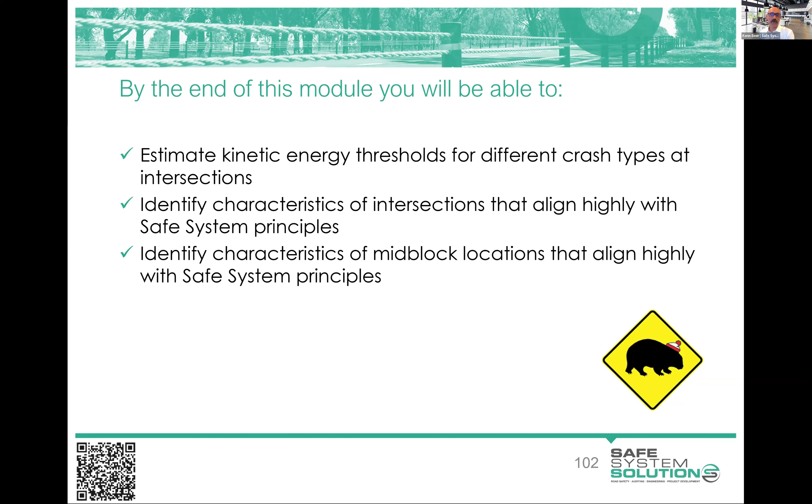This session, we're going to dig further into kinetic energy thresholds and kinetic energy management for intersections, and we're going to look at what we can alter in intersections to improve safe system alignment. Then we'll do the same for mid-blocks. A mid-block is just basically anything between intersections, the rest of the road network.

If we have a look immediately at intersections, I think everybody intuitively knows that there's risk of crash at intersections, and that's fairly obvious. You can see a picture there of a vehicle-to-vehicle crash at an intersection. That's what people think about usually when they think intersection crash. But I want to flag that there's a lot more going on at intersections in terms of risk than just the vehicle-to-vehicle crash.

We do see increased risk of run-off-road crashes, so vehicles leaving the road at intersections. This is predominantly because they are avoiding something that's happened - another vehicle has pulled out, or a pedestrian is crossing, or something's happened, and they are alert and they avoid that initial crash, but it results in them leaving the road.

Also associated with that, intersections tend to be a point on the road network where there is a lot of fixed hazards, a lot of fixed point source hazards. So we might have things like signal pedestals, we might have culverts, we might have power poles, because you need to take the power line that's running along one road and turn it so it goes down the other, where you need a pole there.

I talked about culverts, where you need to get the water that's traveling along to go under a road, essentially. So what happens is we've got an increased chance that a crash will happen, and then we've put in place things that make it more severe when it does happen.

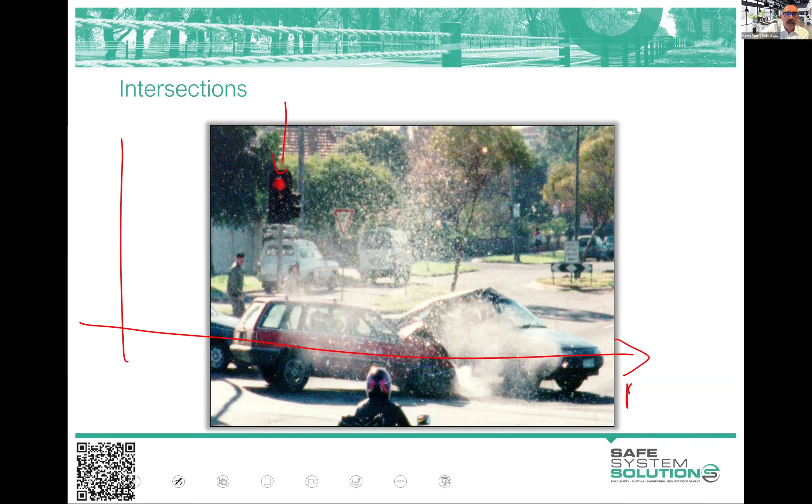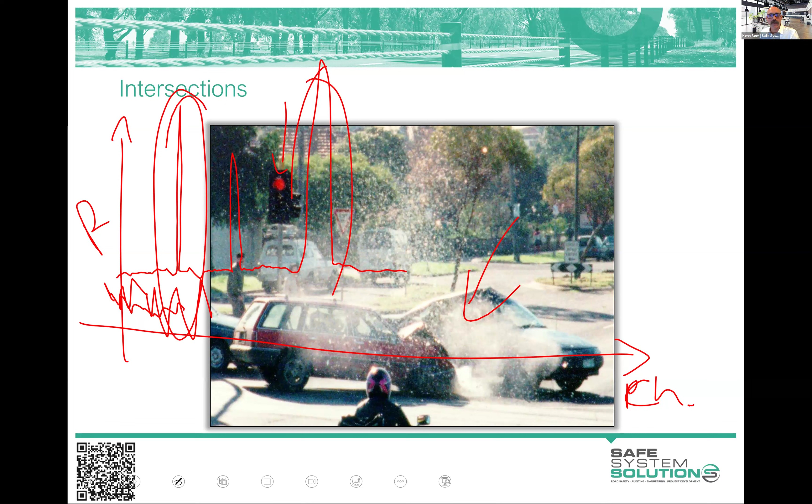If you look along a route and take a risk profile along the route - so we'll make this chainage, chainage is like length along a road, and we'll do risk here - we'll see that risk bubbles along and then spikes. There's inherent mid-block risk down here, but then at each intersection we just see this spike in risk. The risk is of crashes like this, but also crashes involving leaving the road, hitting objects, and the fact that pedestrians have to cross, cyclists are subject to turning traffic, and all sorts of other challenges. So intersections become this really interesting point in the road network.

Monash University Accident Research Centre a while back came up with some high-level principles on the management of intersections on the road network to align highly with safe system principles. The first ones to see there: fewer vehicles and fewer intersections. Very interesting starting point, isn't it? You'd like to think, oh well, the way we make intersections safer is to get rid of them and get less people traveling through them.

Both of those influence the exposure to crashes. We talked about right at the end of last session: exposure to crashes, likelihood of crashes, and severity of crashes. We're going to continue working on that throughout this module. Your little assignment that you're going to be given after this is associated with digging into what influences exposure, what influences likelihood, and what influences severity.

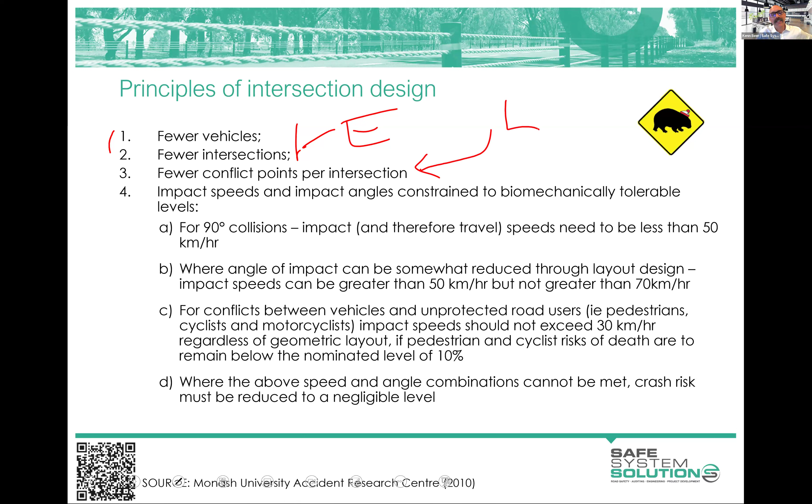Fewer conflict points per intersection influences the likelihood of intersection crashes. The fewer points you can crash at, the less chance there are of crashes. Then we get into all the things that influence the outcome, the severity of crashes. That's the angle of crashes, the speed of crashes, and the vulnerability of road users involved in crashes. We go back to our safe system threshold speeds for different crash types to understand what speed we should be managing intersections at, what angles we should be having conflict points at to lessen the risk.

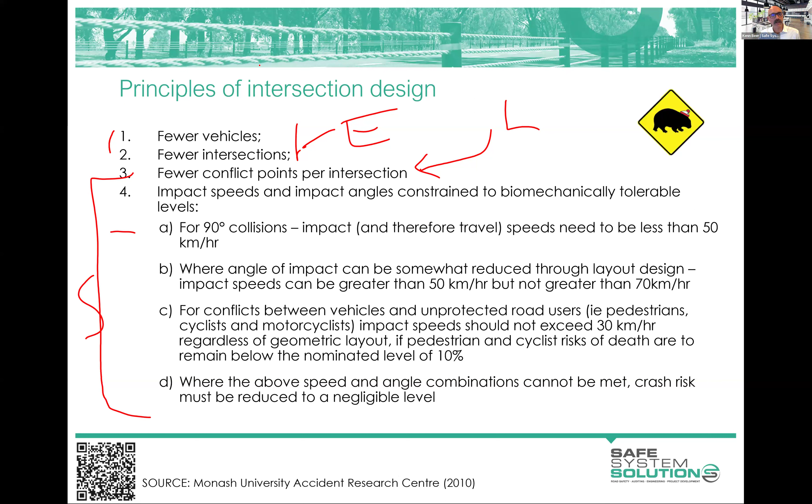I think probably the easiest way to do this is through some real world examples, some case studies, us analyzing some intersections and looking at what is influencing risk and what ways we can alter this and manage it. So I'm going to jump off this slide now.

I think simplifying some of those speeds and angles, we can use this information to say, well, 50 kilometers per hour for 90-degree vehicle-to-vehicle crashes. So crashes, this is car-to-car stuff.

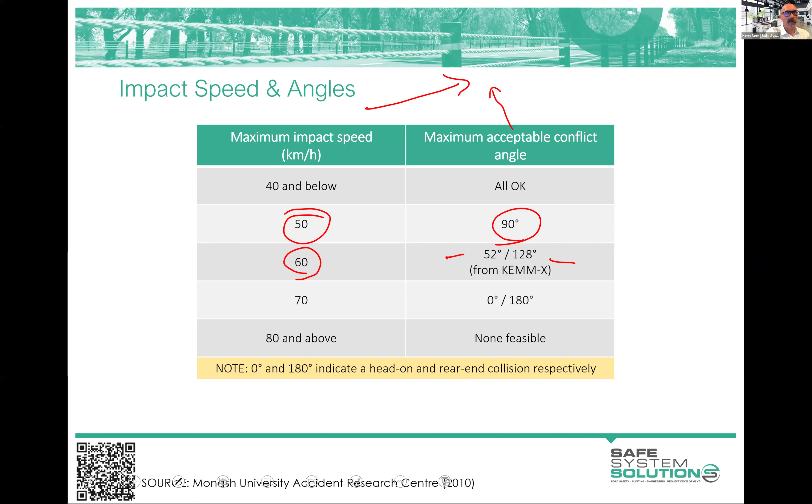If we get more speed on it, we have to improve the angle. So what I mean by that is if you can crash at about 50 kilometers an hour bullet vehicle speed, if you can improve the angle, you sort of bounce off a little bit. You push energy into the environment. You remember this from year 11 vectors, probably, physics. That angle crash pushes energy into the environment a bit. So we can get a bit more speed of that crash happening.

70 for head-on and rear end. But do remember this is delta V. So you can have vehicles crashing with these sorts of angles, and we know that one of them could be going 150 and one could be going 170, and we've only got a 20 kilometer per hour delta V there. So the initial hit and the transfer of energy is well within tolerable limits of any sort of configuration that they hit. Of course, traveling at those speeds and then leaving the road, possibly, then we're way out of the territory of survivable energy. But for the initial crash, at least, that's certainly within energy transfer survivability.

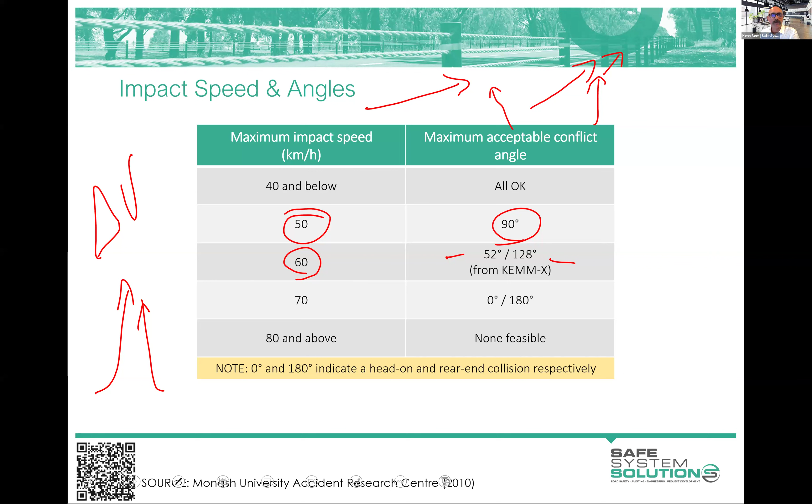So as Safe System assessors, we can estimate angles crashes will happen and speeds, and that's what we're assigned to do.

You don't need to be this precise, but anybody who's in CAD can easily do this. We can just say, okay, we've got a vehicle that's coming out here and we've got a vehicle that's coming down here. I'll change the color of this just so it's a bit easier to see. Vehicle coming down here, vehicle coming out here. Okay, that's kind of about a right angle, isn't it? So that's probably, officially it looks like it's 104.

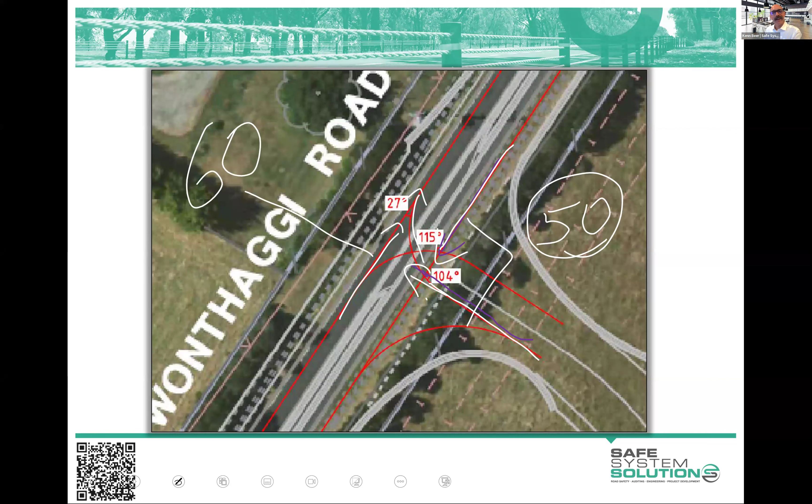But it's close enough to a right angle. We know that it's about a 50 kilometer per hour crash is about our limit for passenger vehicles. Over the other side here, okay, well we've got much more angle on this, so maybe that one could be more like a 60 kilometer per hour crash. So you can see we're taking angles of crashes, we're taking the road users involved, vehicles, and we've related that to a threshold speed, a speed that we can't really do beyond before it becomes much higher risk to road users.

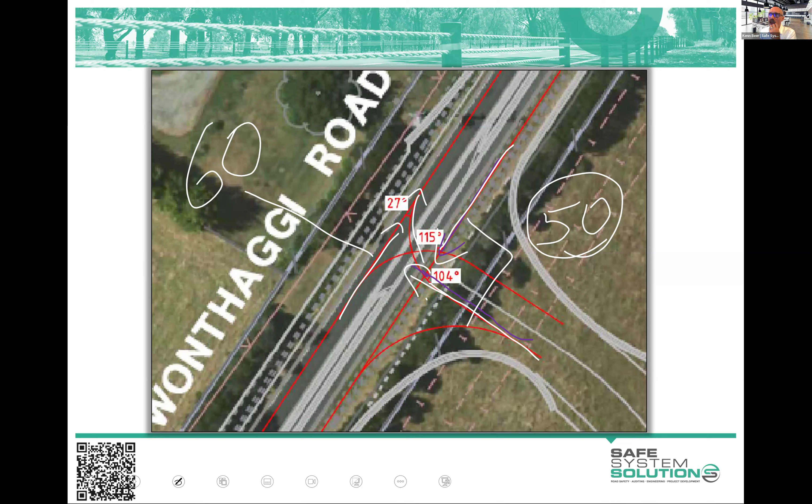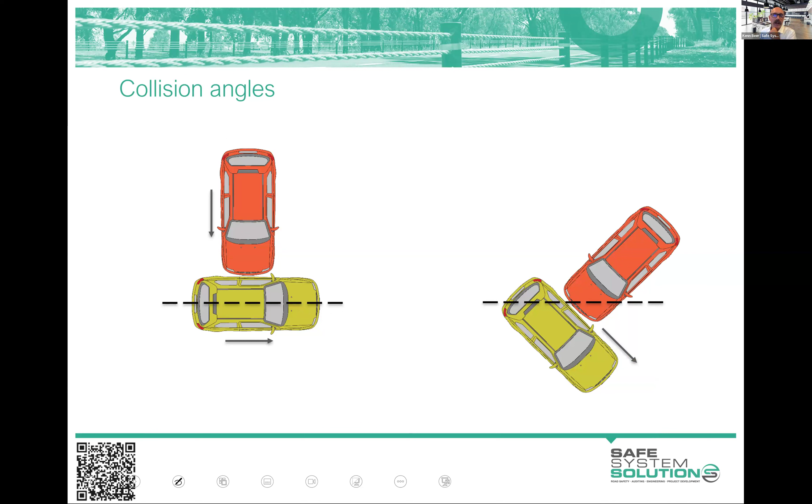Another thing to always remember is vehicles clipping other vehicles, avoiding vehicles leaving the road, crashing around intersections and the hazards. Secondary crashes, we'll often call these, where the initial crash may not actually cause the damage. It's hitting those power poles and trees and things around the intersection that causes the other impact.

The Centre for Automotive Safety Research did a big study on this, and they looked at intersections and where secondary crashes had caused death and serious injury, plotted those onto the one axis, and we see there that you've got vehicles coming into an intersection. They replotted them all onto the one axis, and that's where our secondary crash impacts are likely to happen. Kind of obvious, isn't it? Did they need to do a big study on it? Probably not, but nonetheless, that information is there.

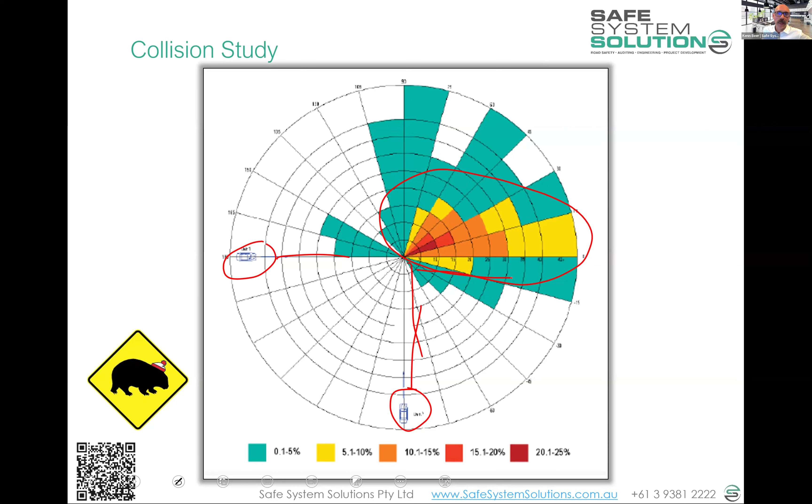Yeah, we do have a question. Is mid-block accident likelihood increasing, Ken, with numerous high-speed crashes being reported in recent times through suburb racing and pedestrian deaths?

It's a good question, I can't say definitively yes or no. It's increasing, it's decreasing - run-off road crashes with death or serious injury remain a very high proportion, especially in country areas, though urban areas certainly have it too. We see different things hitting media headlines which influence our thoughts on that. Most jurisdictions put out fairly comprehensive death and serious injury analysis reports, but they usually lag by about 3 years in terms of getting data together, analyzing it, and going through layers of ministers and executives reviewing it before release. Nonetheless, you can track that for your jurisdiction - it's usually publicly available, so I can't answer definitively, but good question.

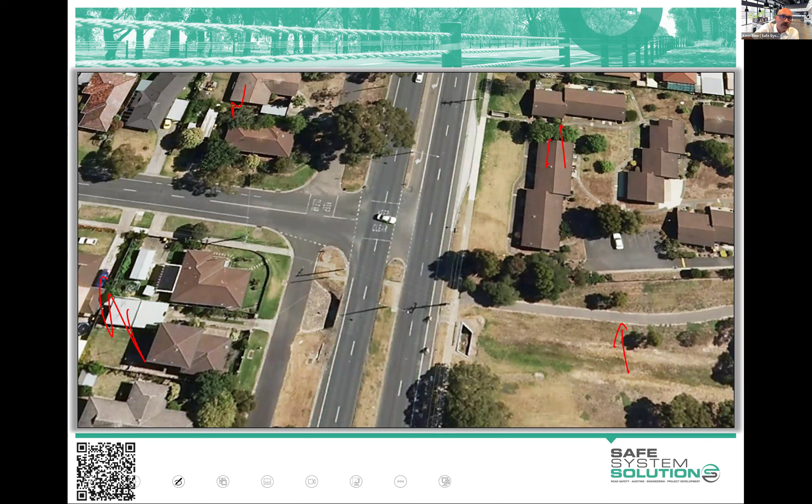So we've got a residential area. This is a shared user path down here. This road, the main road, is a 70 km/h arterial road with 22,000 vehicles a day, and a decent percentage of heavy vehicles - 12%. So: 12% heavy vehicles, 22,000 vehicles a day, 70 km/h speed limit, 2 lanes in each direction, as you can see.

The side road here is a 50 km/h speed limit, with about 2,000 vehicles a day, mainly an urban collector style road. There's a school up the road, about 400 meters away. These are service roads - two-way service roads - with access points further down, just providing access to those properties essentially.

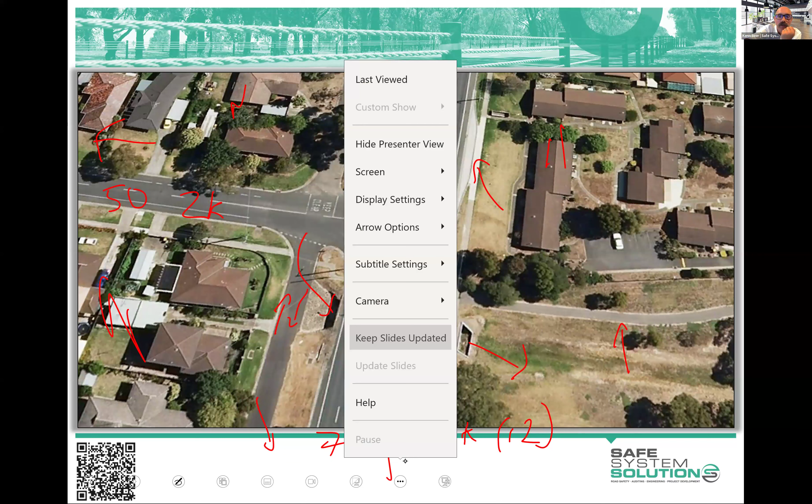What else can I tell you about this? That's a bus stop, this is a bus route, this is a B-double route. That is a drain culvert, so water would go in there and out there - it looks big, but it's not, probably about a meter and a bit high. Up the road here, about 400 meters or maybe a bit less, you've got a set of traffic signals. Down the road, about a kilometer and a bit, there's another set of traffic signals.

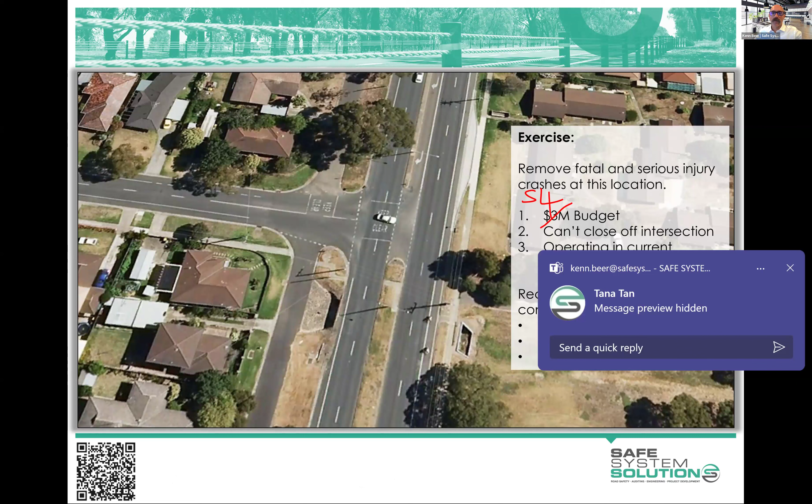So your job here is to eliminate death and serious injury at this intersection. Now I'm going to budget constrain you - I'll give you an extra $1 million, so you're going to have $4 million. I've got my Teams thing happening again - you got $4 million.

You can't close the intersection, so vehicles need to be able to come out and turn left and turn right, and they need to be able to turn in from both directions. You're also operating in the current political organizational framework you're currently in, so think about how, if you've got some really wild ideas, you'd navigate them through actually getting approved and seeing them on the ground. But the big thing I want you doing is for every idea you come up with, have a go at categorizing them - is that influencing exposure to crashes, likelihood of crashes, severity of crashes, or a combination?

Now some of you probably don't have any idea what infrastructure or other initiatives cost, so I'll be your instant cost estimator tool. If you have an idea and wonder how much that would cost, just put the word 'cost' with a question mark into the chat and say what you are thinking about, and I will tell you how much it costs. So you could say grade separation, like a flyover or overpass, and I would say $47 million - well outside your budget. What's the cost of traffic signals? The cost of traffic signals would be $3.1 million.

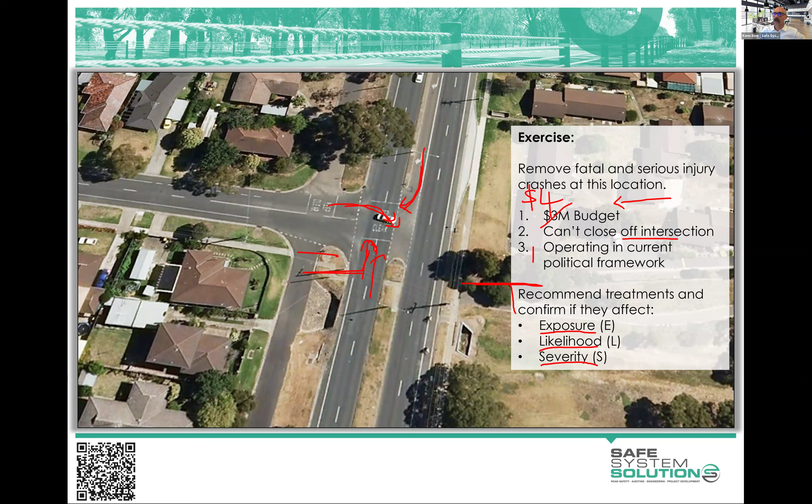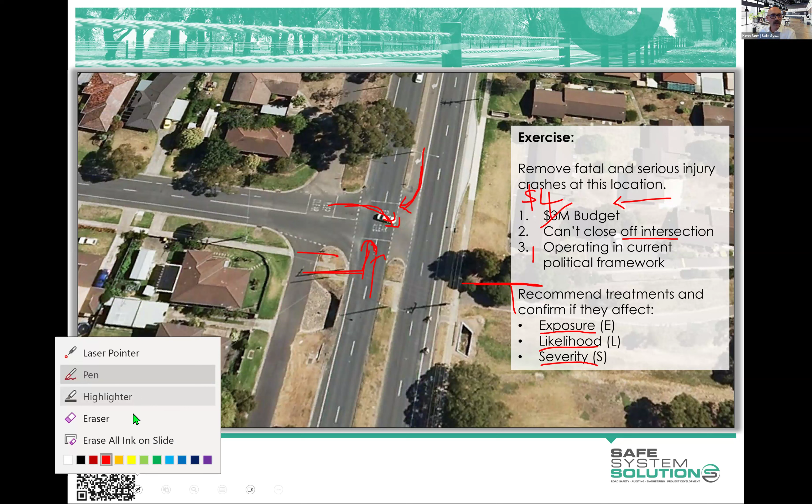And what I'm really interested in is ensuring we get our head around exposure, likelihood, and severity. So let's go. Where am I going to start? Okay, so we had traffic signals. Quite a few people gravitated towards signalizing this intersection.

I think some of you have been around managing road networks and the like for a while, and you can sort of immediately see some of the things, the unbalanced flow, so lower volume and higher volume, which usually signals if you're needing to control things, comes out as something you tend to like to do.

And then there's a bit of inconsistency across this group on whether traffic signals influence exposure, likelihood, severity, or some combination. The way we need to think about it is that traffic signals don't alter the number of vehicles, pedestrians, and cyclists going through this intersection. Yes, there's probably some situations where traffic modeling shows a little bit more because they use this intersection now, or a little less because they avoid it, whatever it is. But in the scheme of a safe system assessment, that's usually not big enough to actually change your exposure to crashes. Because exposure is just numbers, right? How many vehicles, how many people, how many cyclists? So by putting signals there, have we fundamentally changed how many go through there? No.

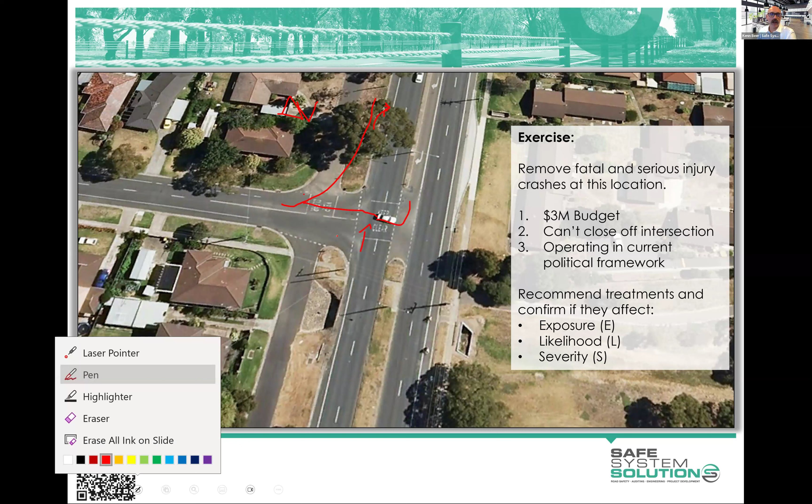Just reading through a few here. We've got some people who want to do left in, left out, and they're really determined to do that. I was trying to say we can't close this, but I like the idea and I like the pushing, because fundamentally, if we could close this whole intersection and divert vehicles around to an existing, very safe intersection, that's a far better outcome. Or if we could close this off and just have vehicles going left out of here and left into here.

We've got friendlier crash types because of the angles. And then you would have to create some sort of U-turn facility. So a vehicle comes out here, merges over time, turns, merges back in and accelerates. So that would be good.

I would call that lessening the likelihood of crashes as opposed to the exposure to crashes, just for the fact that we still have the same amount of vehicles doing the same thing. Within the general envelope of the area, they're still exposed to crashes, different crash angles and those sort of things. So it reduces the likelihood of crashes. I think if you got your traffic modeling done, you'd find that altered the number of vehicles trying to make these turns a bit.

Okay. So we've got a username in here, Crockerell. Maybe that's the surname. I'm going to give a prize there, Marissa, because we've got quite a bit of detail on this one and some good ideas, and reasonably good in terms of the categorization. Could do a little improvement.

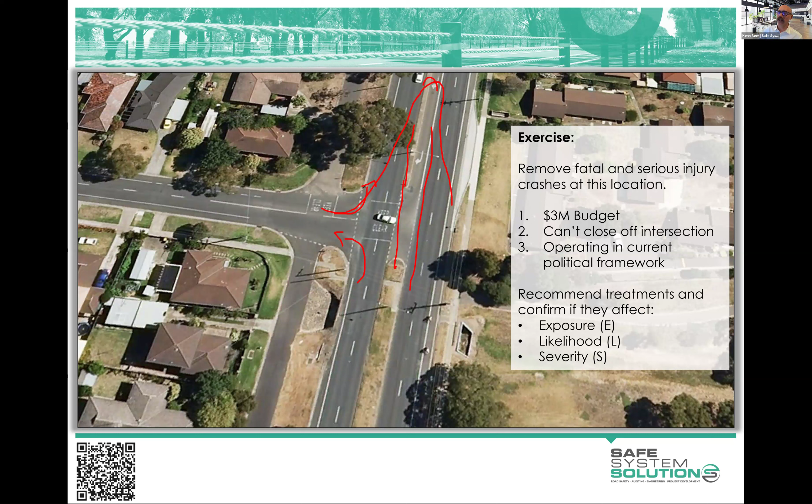Talking about a mini roundabout. Now I like this, because I said a full-size roundabout would cost a lot. What about a smaller roundabout? Good thing to think about. And that would actually influence the severity of crashes.

We would still say we're going to get the same exposure, because the same number of vehicles, pedestrians and cyclists are going through. The likelihood is a really interesting one, because it just changes the types of crashes that are going to happen. You'll get more rear-ends, more sideswipe crashes, but the severity is going to be much, much lower. And then some associated works, speed zone reviews and the like.

I'm just jumping through here, apologies if I jump past. I'm looking for something a bit different out of there. So one-waying the service roads, okay, that would just influence the likelihood of crashes. People may say, oh no, there'll be less vehicles now. Well...

Again, I don't like in a safe system assessment to make very firm predictions on alterations in patterns and the like. You're just less likely to crash if it's that consistent way to go. Mind you, I don't think alterations to the service roads in this scenario will have a lot of impact on safe system alignment.

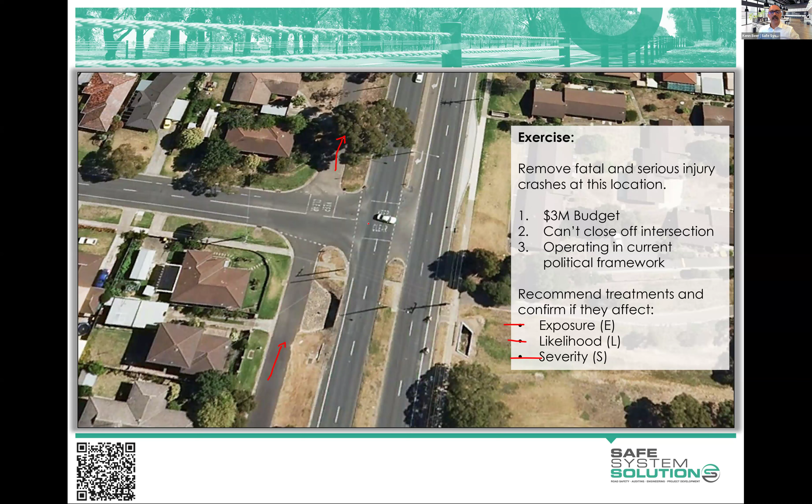Great group. Okay, I think most of them I'll talk to in one way or another as I tick through a few slides. But thank you, I really like the fact that people are having a good crack at that definition of exposure, likelihood and severity. And what I want to do is make sure I talk to this intersection, and intersections in general, and really be talking about exposure, likelihood and severity.

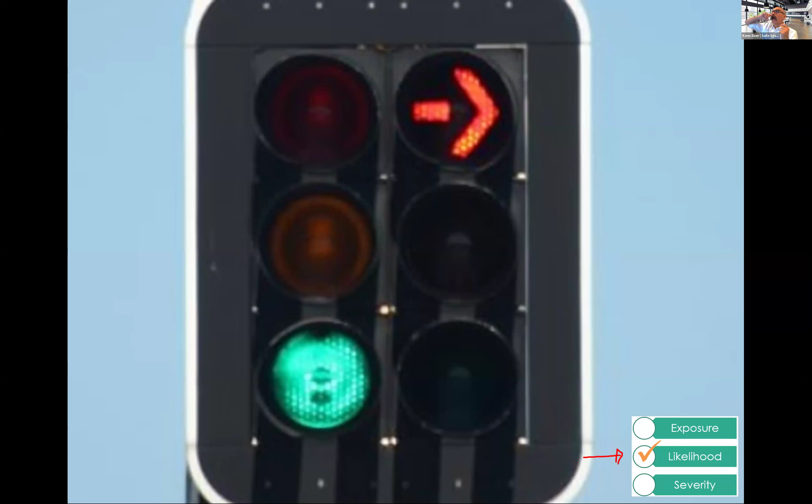So let's unpack that signalization that a lot of people wanted to do. As I said, you'll see this little checkbox appear a lot of the time: signals influence the likelihood of crashes. We know that if you take an intersection like that, controlled by a give way sign, where people are making their own choice when they go in and out, from thousands and thousands of intersections across the world that have gone from something like that, or a stop sign, to having traffic signals, it reduces crashes by about 45%.

Okay, so that's pretty good. 45% reduction — we call that a crash reduction factor, or if you inverse it, it's a crash modification factor. So, 45% crash reduction factor, and that's by reducing the chance that a crash will happen.

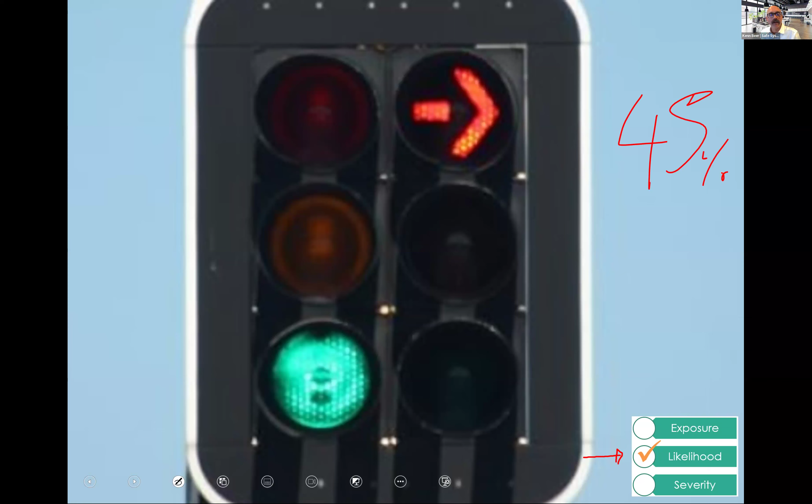And what you'll discover is your outer, or any metropolitan location basically, all the death and serious injury we're seeing as hotspots are signalized intersections. So traffic signals, they reduce death and serious injury, but by no means are they safe. And in fact, if you filter your top 100 intersections in your city, state or region for death and serious injury,

the overwhelming majority are going to be signalized intersections. And the reason for that is partly the exposure. Yes, we have lots of vehicles, lots of pedestrians crossing, lots of cyclists, and we have these conflict points. So there's lots of exposure, right?

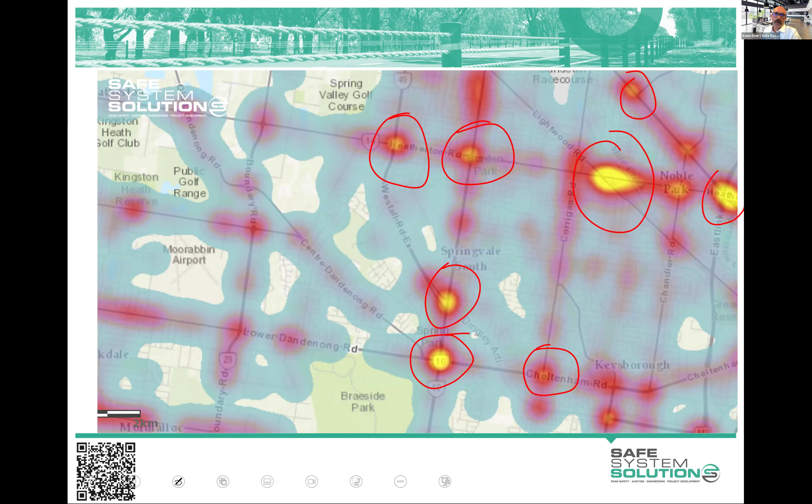Yeah, we need to change that attitude. I like the fact that people are looking at roundabouts. Yeah, there's some practical challenges with it, but the reason I like that is because roundabouts actually align very well with safe system principles, because they are addressing the severity of crashes. And they address that through a number of ways, predominantly through the fact that everybody slows down approaching them. So when the crashes happen between passenger vehicles, they're very low severity. Now, I've got a whole module coming up on pedestrians and cyclists at roundabouts and the like.

So there are particular challenges there, but roundabouts perform just amazingly well for passenger vehicles. And I said signals were about 45%. But for passenger vehicles, we see above 85% reduction in death or serious injury at a one-lane roundabout. They virtually eliminate death and serious injury. There's some exceptions and things we probably still need to work on, but it's a very amazing road safety feature.

But why do they need to be so big? We need them to be so big so a large vehicle can get around it, basically. A large vehicle has this swept path and needs to be able to turn. And yeah, sometimes we want to do deflection on the approach to the roundabout as well.

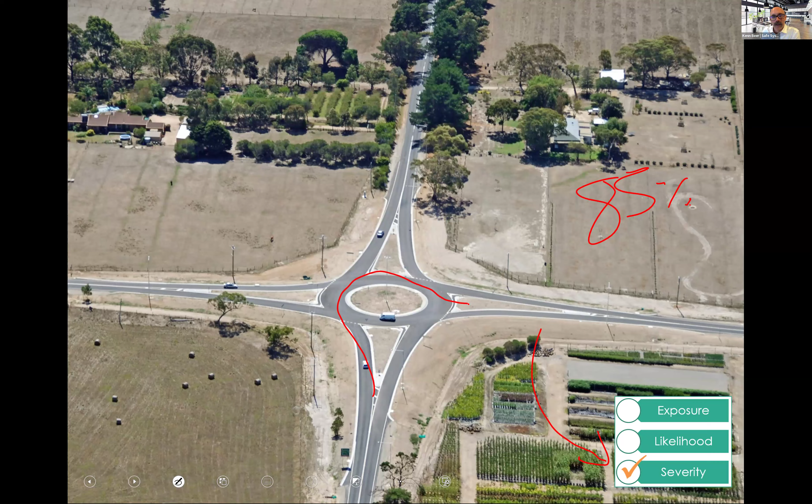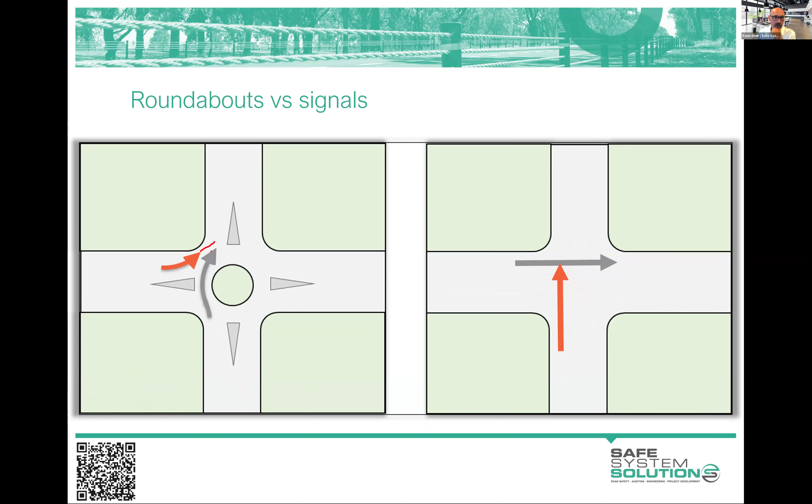Here's a set of traffic signals. Lots more ways that you can crash and lots more severe ways that you can crash. The angles that these happen at are better for roundabouts - that's in those severe crash angles. This is bad angle, this is good angle to crash.

People drive and walk and ride around the road network in all states of consciousness to a degree - driving is the one where they're most tuned out. They're thinking about the fight they had with their partner, or they've worked a double shift and then they're driving to their brother's wedding, they've had a few beers, or they're distracted by things. There's so many states of consciousness of driving. There's a lot of good people doing a lot of work to try to better this, but there is a huge amount of driving that is just not with it. You've probably done that yourself - you've probably gone, oh, I don't remember the last 5 minutes of driving, how did I get here? That's scary. You're not a bad person, you're just a human, and these things happen.

So we do have multiple levels of why people are not highly attuned and engaged in the driving task 100% of the time. A roundabout, or some physical infrastructure in the middle of the road, actually activates the driver in the task of driving at that particular point in time. They look around, they concentrate, they slow down, they're more aware of that driving task at that position in time. But a set of traffic signals is much more inefficient in activating the driver in the driving task, and we see them drive straight through signals. Sometimes it's more intentional, but sometimes it's absolutely not - they've just missed it, missed the signals. 'I didn't see it, I just drove through it.' And they're going at speed, and the angles that crashes could happen are bad.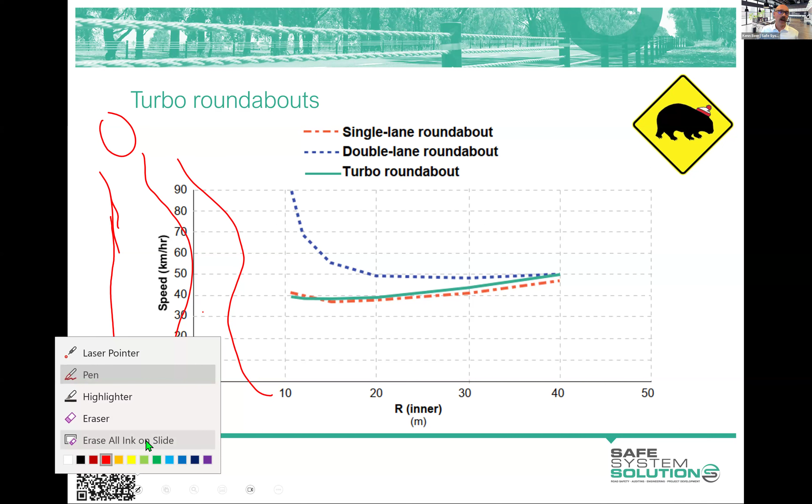Whatever happened to the design of roundabouts with reverse curves? They seem to have disappeared in recent designs. What we're talking about is reverse curves on the approach to a roundabout - if you have a high-speed road coming into a roundabout, people can come in very fast. The idea is that if you chicane them in, they have to slow down on these curves. Jurisdictional design practice differs on this. A high-speed roundabout in Victoria will have reverse curves. In Victoria, you would never use speed limit reduction around a roundabout - you let the geometry of the road slow people down naturally. In some jurisdictions, they speed limit the roundabout instead, which lessens the need for reverse curves and geometric slowing. I'm personally not the biggest fan of that, but that's what's going on.

Mini roundabouts - if a truck or larger vehicle can drive over the roundabout, would that mean the driver wouldn't slow down? To a degree, most heavy vehicle drivers take their turn movements fairly slow in order to not tip their vehicle. We've got to be careful with geometric design at intersections to ensure vehicles aren't tipping. So it's something to consider, but I think it probably gets self-regulated a bit in one sense.

How do roundabouts compare to signals from a pedestrian and cyclist safety perspective? We have modules coming up on pedestrians and cyclists at roundabouts. What we see is cyclists have a higher risk of being killed and seriously injured at roundabouts than at some other intersection forms. Pedestrians don't show this as clearly, but the data is wacky - roundabouts are so prohibitive to people walking and crossing that exposure is lower, and a lot of studies haven't accounted properly for the change in number of people actually using these intersections when walking. You can't deny we get speeds down at roundabouts, which is good for everybody, but some of that complication for other road users needs to be addressed - I'll give you some good ways to address that in the next module.

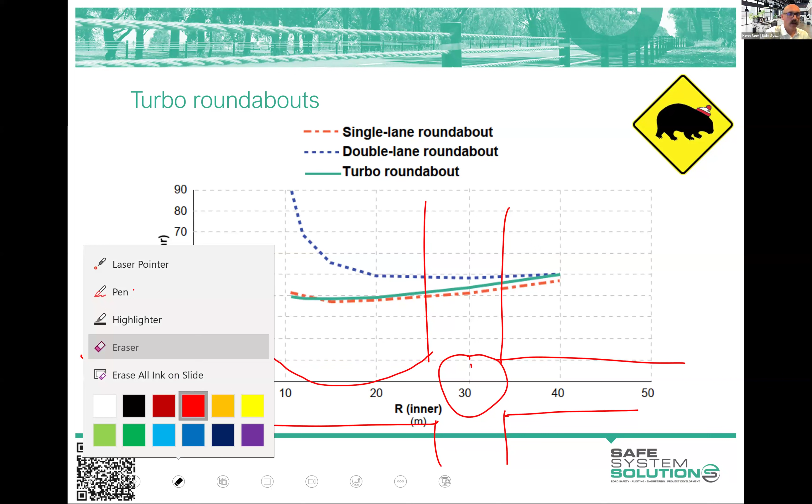Someone's asked for a bit more explanation on reverse curves. So you've got a road going straight into an intersection, and you want to put a roundabout there. We get worried that people will approach this too fast, so we actually put curves in the road back here - what we call a reverse curve, going one way and then the other. You do it with the whole road, so your carriageway comes in like that. The idea is that you get the driver to slow down to go around these curves, and then they reach the roundabout going slower.

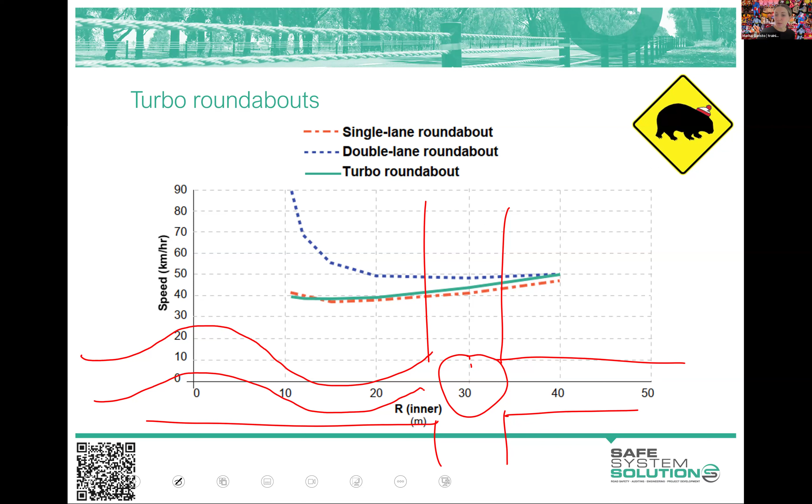Because it's not done, I think what would be easier would be mini roundabouts - really just very mini little roundabouts that you don't have to change much and can be completely driven over, just to still give that same disruption to priority, just because Australians are more used to roundabouts and happier with that.

Adam is asking about turbo roundabouts. Well, I'm about to have a chat about turbo roundabouts, so I'll get to that.

With reverse curves in built-up areas, how does this work? Would you need to access private land in these cases, or does it inhibit cost? You only really use reverse curves when you have high speed areas. In urban areas, you don't use reverse curves often because the approach speeds are low enough that you can just use the roundabout itself to get that little extra bit of speed reduction. And yeah, you'd be acquiring significant land.

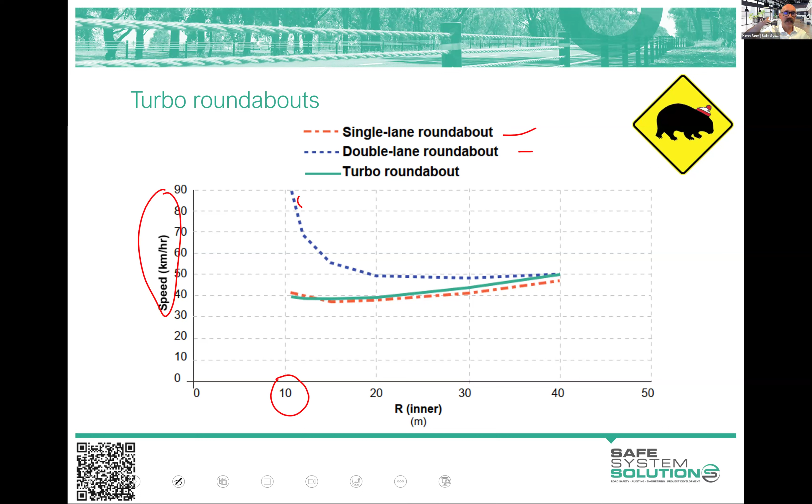Okay, let's talk about turbo roundabouts. It was more just showing that there's lots and lots associated with roundabouts. Single lane roundabouts perform really well - speed is a very good proxy for risk, usually. Double lane roundabouts start to get problematic when they're small roundabouts and you see high speeds through them, people taking straight lines and really going fast. Turbo roundabouts are a 2-lane roundabout, but you can essentially get safety performance back to a 1-lane roundabout.

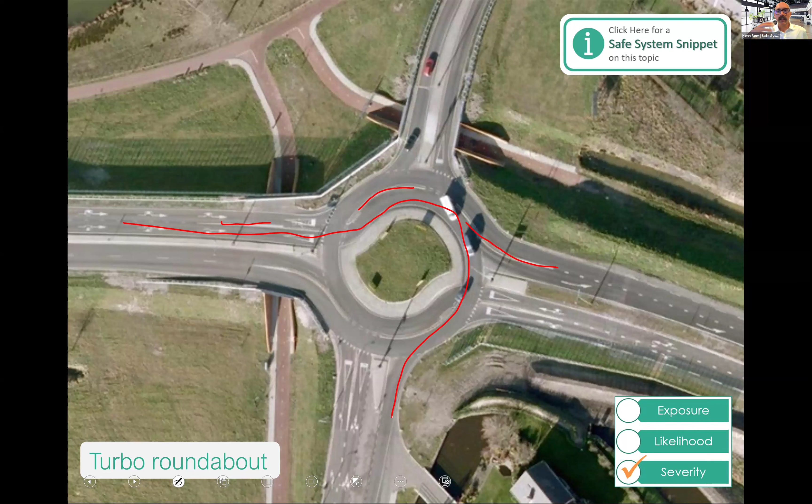Let me show you another one. Here's another good one. You can see there that the vehicles come in, they slow down, and they keep to their lane and can't take a fast straight line through it. Look at this wonderful little interaction happening - here we've got a truck that looks like they've entered the intersection inappropriately, as in not at the right time. There's a vehicle there, we've got a vehicle here that's coming up there. We know that's going to be okay, don't we? That vehicle cannot be going very fast because this is a very radial roundabout, which is another different thing I don't have time to talk too much about. But they've come in there and then they will be going very slow.

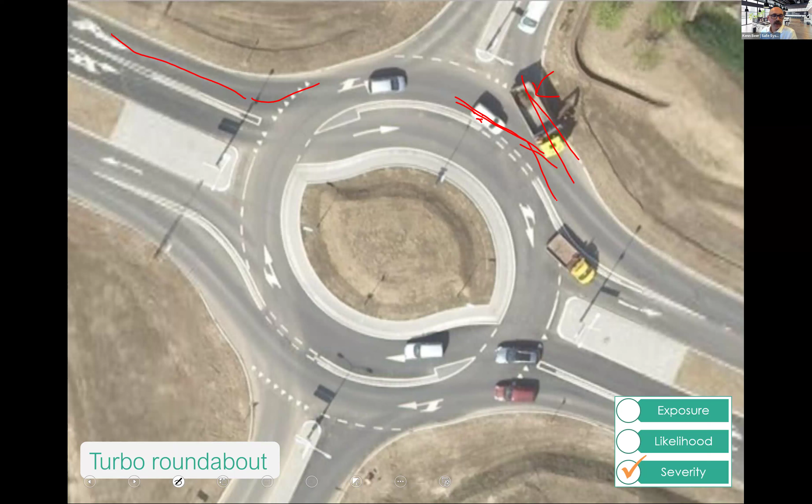Also, look at that angle - it's beautiful, isn't it? If that vehicle does hit it, the energy, they'll sort of bounce off a bit. It's low speed, it's good angles, a mistake is happening, and it's likely to be, at worst, a fender bender. They'll probably avoid that crash altogether.

Here's an exciting turbo roundabout, isn't it? Now, I put this up because it's awesome. I don't think it would be as mind-blowing when you're on the ground and you're just navigating through it. It is signalized - this is in the Netherlands, but the reason I put it up there is to talk to you about the philosophy people use around the world and the differences.

We had a Dutch engineer that we brought out to delve into cyclists at roundabouts, and design, and how we can do better catering for that. I showed this to the Dutch engineer and said this is just fascinating - look at the land area on it and the complexity of it and all these sorts of things. He asked, well, what would you do here? I said we had a bit of a chat about the volumes and speeds and things. I said it'd probably be a large signalized intersection running at 70 kilometers an hour on both legs with sort of 3 lanes in each direction. He was just like, what? But what about all the death and serious injury? How can you leave that much energy for the individual driver and mistakes? He was just gobsmacked.

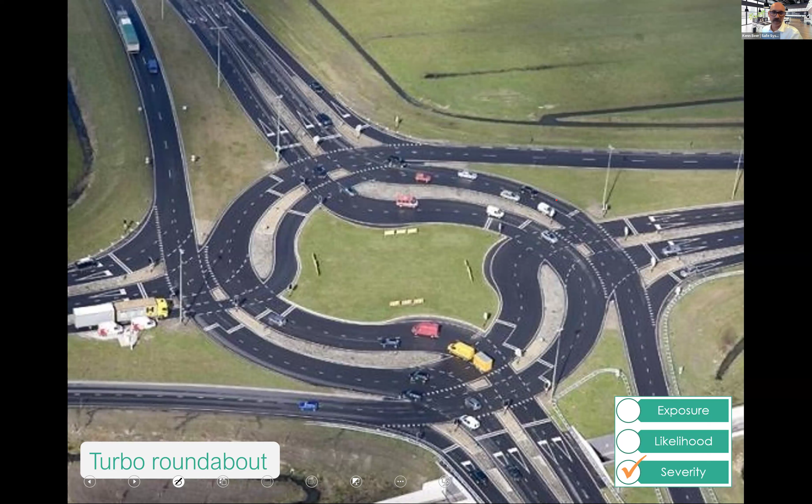There's a lot more people pushing Australian and New Zealand intersections to say big signalized intersections still seem to be pretty important in terms of managing traffic, moving people around, and controlling things with signal optimization. But are there characteristics we could implement that would reduce people's speed through the roundabout, change the angle, wake people up? This is just a concept, not actually built anywhere, but I like that people are now starting to question that big intersection with 2-3 lanes and high speed. They are just catastrophic for the health and safety of our community.

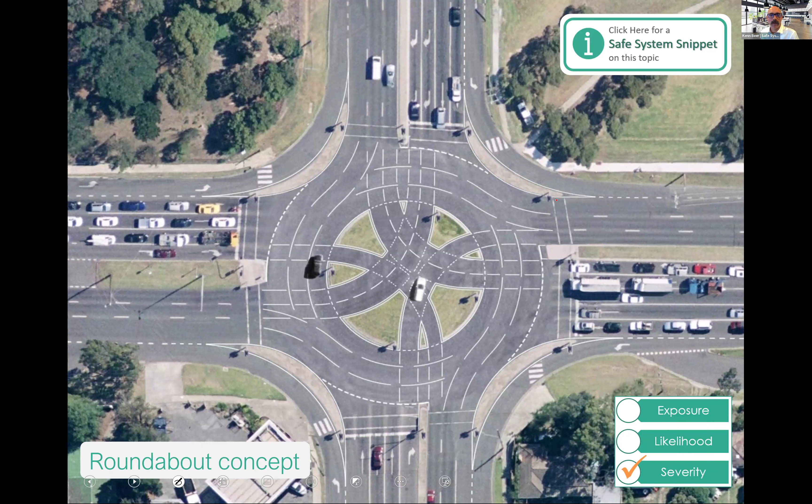One thing that didn't come up a lot, although a couple of people started to dip their toe in the water, was whether we could actually raise the intersection a bit, like our little example intersection. Could we do some little raised platforms? Not really like an urban speed hump you'd see on back streets or residential streets, but maybe something just to make them go a bit slower.

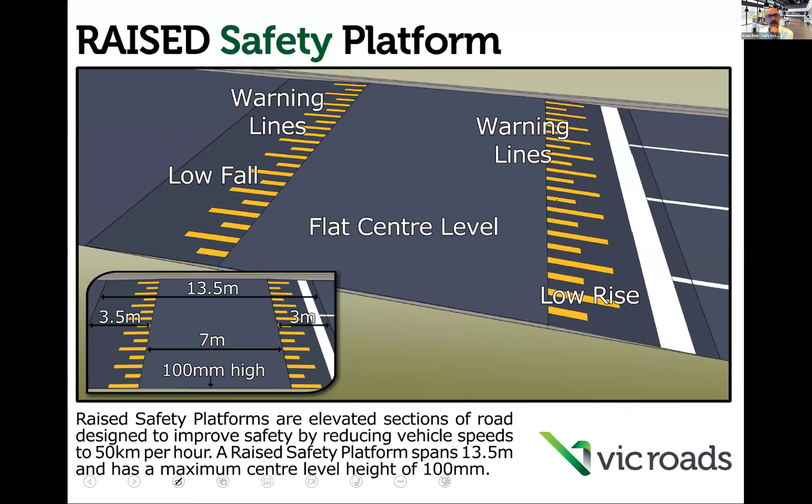That's what the region proposed for that intersection you were looking at. They said, well, we know of our top 100 intersections in our region, about 60% of them are signalized intersections accounting for death and serious injury. Are we really prepared to just build another one and hope for some miracle that this one will perform better than all the others? Then they talked about, could we put more mast arms, more lights? Could we do other things to try to make sure people actually stop at the red light?

They said, could we actually address the severity of incidents that are going to happen? So they decided to try to make vehicles coming up on the main road slow down just as they go through this intersection. They didn't care so much about the vehicle turning in or out, because those aren't the bullet vehicles - they don't have the speed to do the damage, they're going too slow. These main road vehicles were traveling at 70, 75, sometimes pushing 80 kilometers an hour. That's where your energy is, that's where your death happens from. So calming them through this point, which we know is much higher risk.

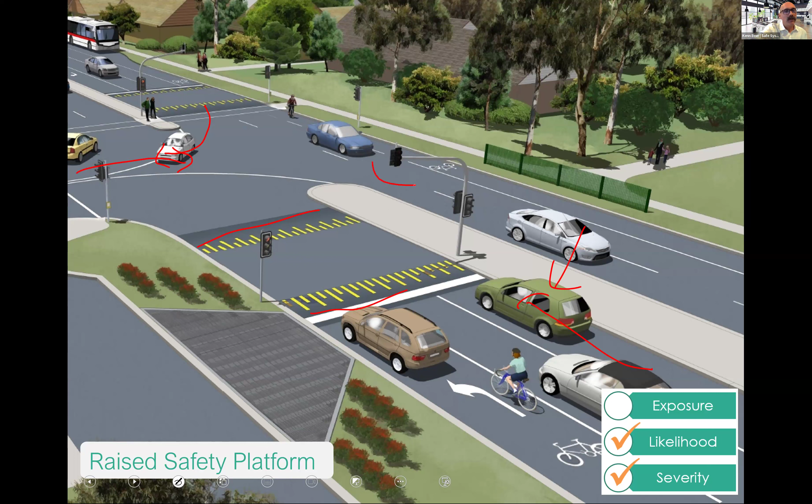The signals will reduce the likelihood, and slowing them will reduce the severity. And that's what they ended up building, right? Let me show you a few photos of that.

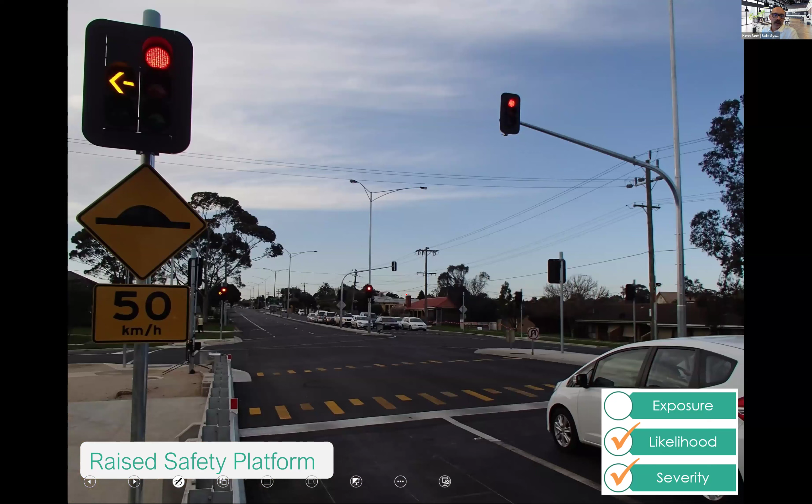There's a couple of points I want to make, then I'll address some of those things that came up. First, I was out there with a colleague doing the post-opening road safety audit of it, and we'd done some audits earlier on. But I took this photo, and I just love it because we've got a green light, lots of green lights, but we've got the vehicle slowing down.

My traffic operations friends, when I showed them this photo, said oh, it's so inefficient, I hate it - why are we slowing all these vehicles down for the 1 in 500,000 or 1 in a million chance that something's going to go wrong? And I'm like, are you kidding me? If we put a roundabout in there, everybody would slow down and you wouldn't have an issue with that, would you? It's just because it's slightly different - something we haven't done in the past, but we need to change what we've done because it's not working. It works to a degree, 45%, but we need it to get to 95, 100%. Well, to get to 100%, we might need to do a bit more, but we can achieve huge benefits here.

The other thing I want to point out is the advantage that the infrastructure itself slows vehicles down. They slow down on the approach to navigate over it, and you give them an advisory speed. This is not a regulatory speed limit reduction, and that comes with lots of benefits because people get narky about speed limit reductions and it gets political. But people are more than happy to slow down, they just want to make their own choice about when they do it. If you make them navigate it, they slow down. It works beautifully, so that's another wonderful little benefit.

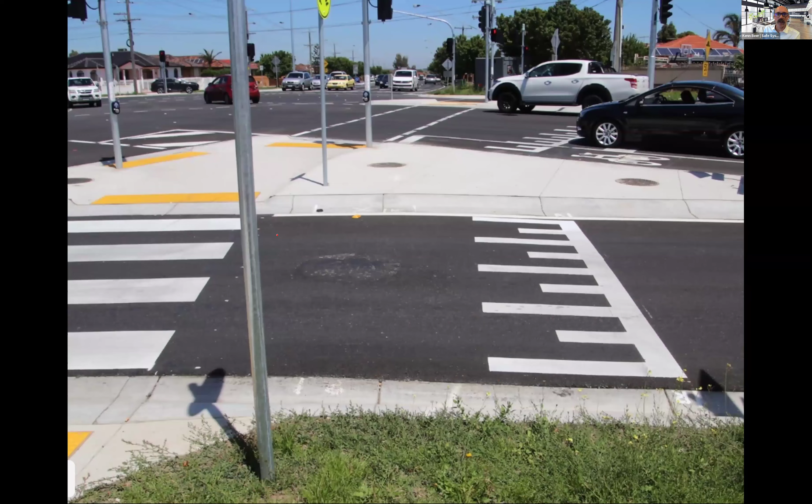This intersection has 52,000 vehicles a day - major heavy vehicle route, major bus route, emergency services route. I'll go back one, I'll do that one - it's the same road, a major arterial. This side road has 27,000 at least. It's a raised intersection - they raised the whole intersection because it's a cross intersection.

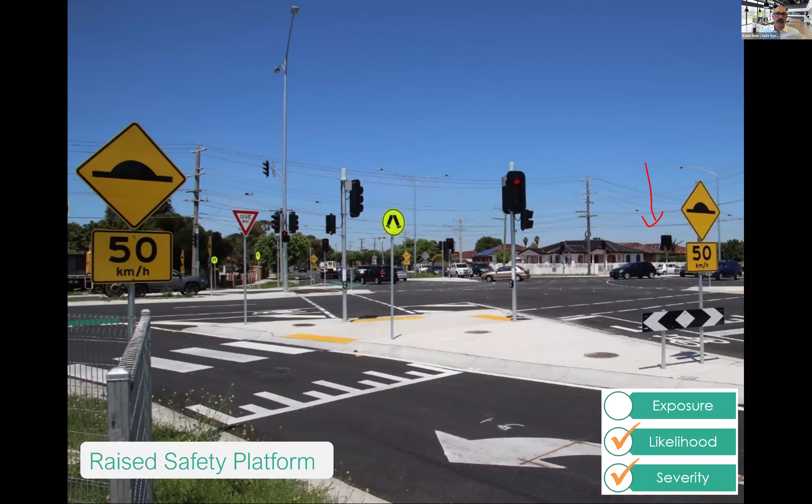I just want to cover a few more points here. This has been good discussion. Just remember to take the principles I'm talking about here - it's not specifically about raised intersections or raised safety platforms, even though they exhibit some pretty good safety performance and pretty good alignment with safe system principles.

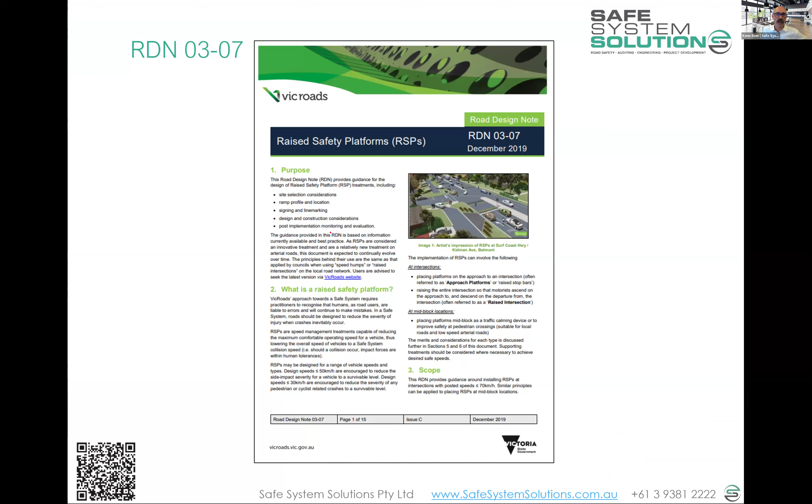For those interested in design specifics, there's a Victorian Road Design Note 0307 you can download, with details on design of raised safety platforms on high-speed arterial roads and major arterial roads and the like. And of course Austroads has a research report on the effectiveness and implementation of raised safety platforms.

So we see Victoria's rolled out a lot of them - well, a lot, I say, about 20 of them - and New Zealand's rolled out quite a number. Other jurisdictions are still pondering, looking, discussing. But I think this, or something else that aligns well with safe system principles, is required. Mini roundabouts or compact roundabouts were discussed.

So mini roundabouts are very, very small. Compact roundabouts are just smaller than anything that Austroads' Guide to Road Design Part 4B would allow. Here's an example of a compact roundabout.

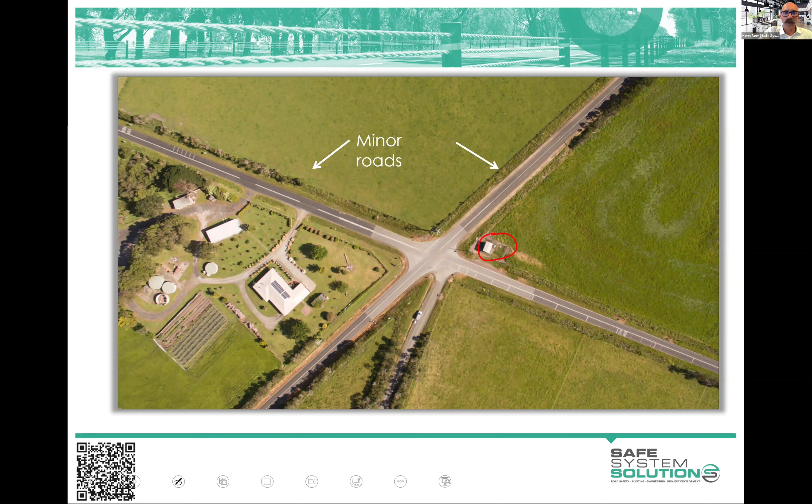This intersection, basically the arterial road, had some pretty bad crash history, a lot of high-speed things going on. They wanted to build a roundabout, then they couldn't afford the $9 million or whatever it was going to cost because of the telecommunication exchange building, because of the land acquisition they would need, big massive swathes of land, plus reverse curves on the approach. It was just huge cost, with services all running through underneath as well.

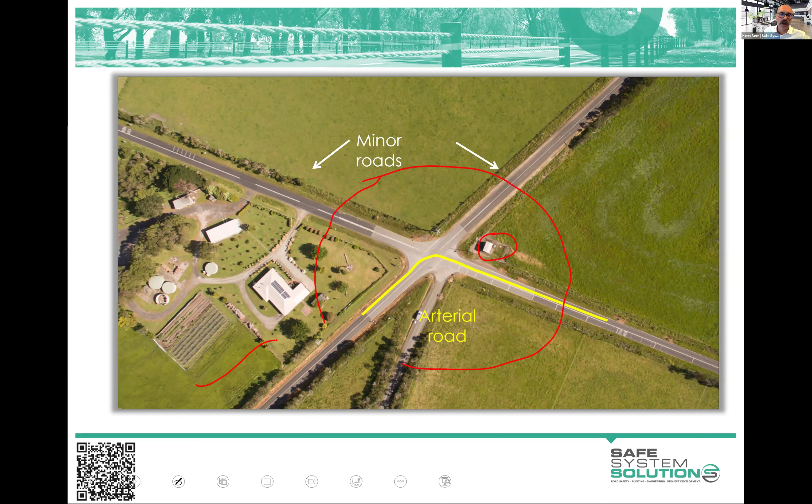So they said, well, what about if we go something small? Go a small roundabout with a very small actual roundabout in the middle there. Like that, the roundabout is tiny. It's got then what we call a concrete apron.

So the bigger circle around it is more an area that trucks can drive over, and then we'll run vehicles straight in. Like we talked about reverse curves on the approach, they said, well, we can't do reverse curves because we just have to buy up people's land to start this back here and curve in there. We'd have to acquire lots of their area.

So they said, what about if we tried some gentle raised platforms on the approach? And that's what was built on this one. Again, I'm not particularly saying this is your answer, but the easy thing they could have done, and nobody would have got angry, would have just been to do a right turn lane and maybe some rumble strips and warning signs on the approach and left it, saying that'll lessen risk a bit. And they're right, it would lessen risk a bit. But to actually get us closer to that fundamental of elimination of death and serious injury, an area like this is going to come pretty close.

People coming in, they slow down because they've got to navigate over this gentle ramp, and then they've got to navigate over this one, and then they've got the roundabout where everybody slows right down.

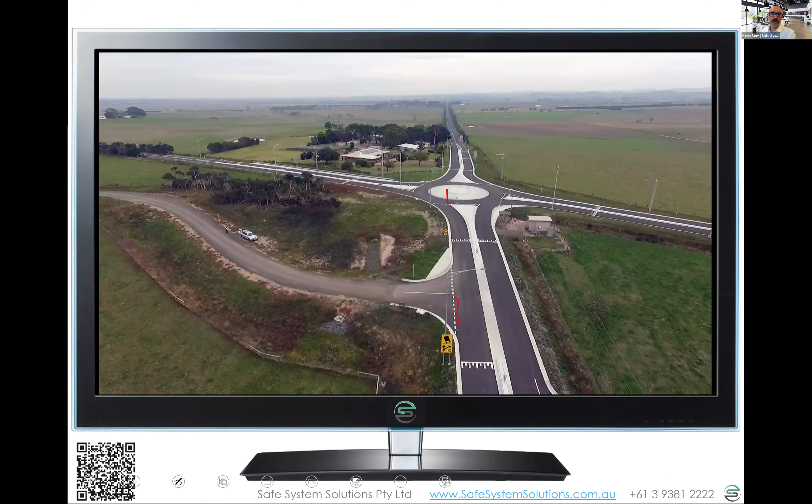Yeah, there's a lot to sort of think about. But we've got a little poll, I hope, and it's just one question, just to make sure you're thinking about things, I think, in the right way.

Let's see, Marissa, if we do have a poll or not. We do have a poll. We've got two, Ken - traffic signals, or true or false? The signals, yeah, okay. So the question that's popped up on your screen, if it's worked, is true or false: traffic signals are not safe system. True, false, or unintelligible question, which means, Ken, your question doesn't make sense - ask better questions, Ken. That's an unintelligible question.

So as we do that, Michael's asked a question about land acquisition and reconfiguration of that entry, fifth leg, and moving things around - why? Well, yes, those things were considered. The end decision was around having all of the legs the same, essentially consistency across all those legs, which, yeah, you could have. There would have been an option to reverse curve on that one approach, but the decision was made there.

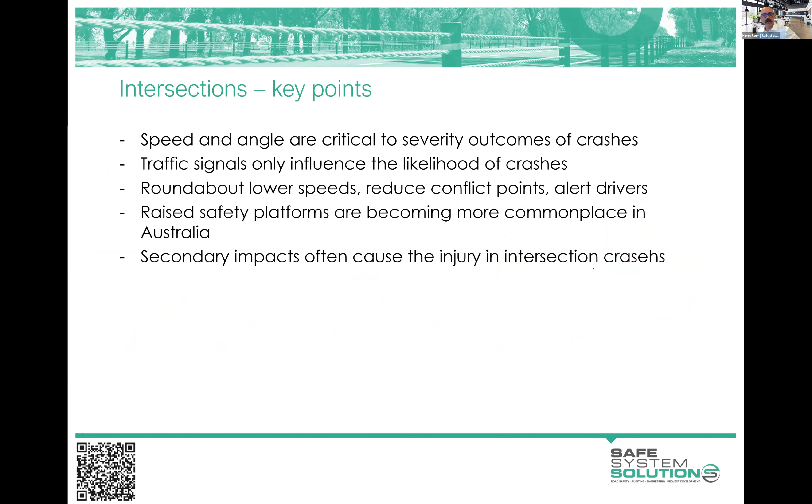In your notes, if you download the PDF, I have a few dot points in summary you can look back at. Now I want to talk a little bit about lane departure.

We won't spend as long on lane departure crashes - this is people leaving the road, hitting trees, power poles, culverts, and rolling over. I'm again focusing this module on vehicle lane departure.

We have a massive amount of road network out there - hundreds of thousands of kilometers of long, straightish road. Sometimes it's curvy, but mostly long, straight roads. It's a big country, Australia.

Bruce, do we have anyone joining us from other countries? I forget for this course - but welcome if we do. You've got a lot of road network too, I'm sure - there's just a lot of road out there.

We do, actually - I think we have a couple of participants from Nepal. Oh, awesome. Yes, you've got lots of windy roads too, with challenges of people leaving the road, falling down cliffs, running off the road, hitting trees, power poles, and structures.

This is the challenge we face - at the moment, a vehicle leaving the road at speed and hitting a tree, a power pole, a culvert, or even rolling over is generally not survivable at 100 to 110 kilometer per hour speeds.

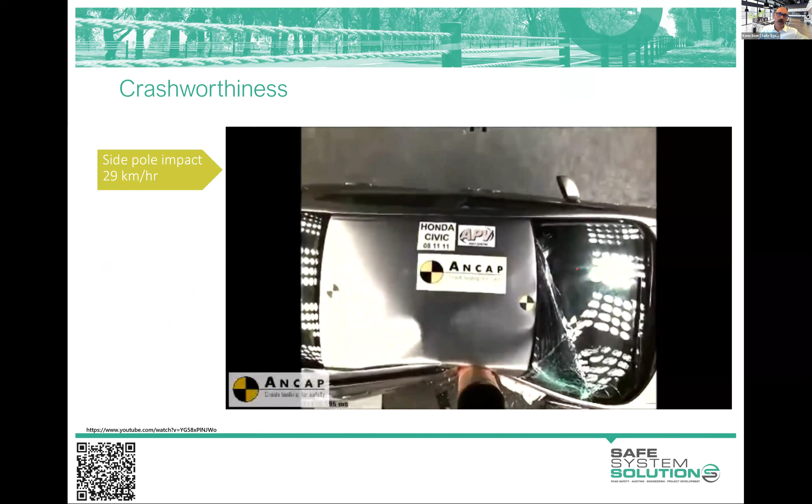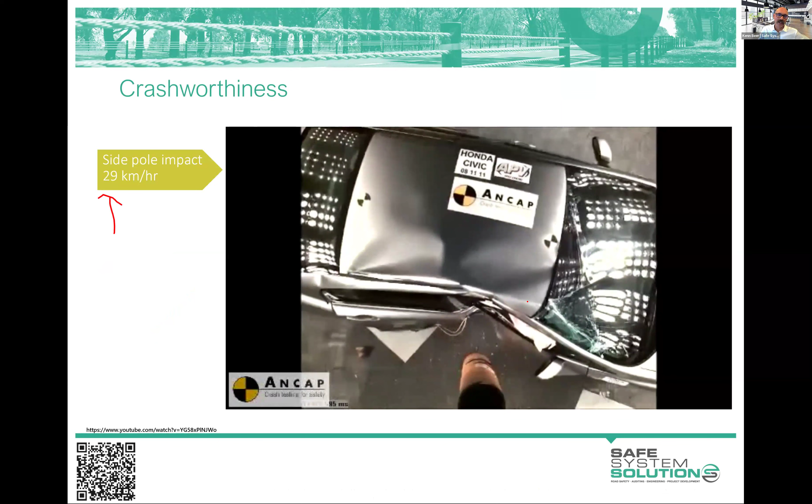I talked about that disparity of speed, energy, and side impact with a pole - we discussed the 29 kilometer per hour side impact crash, now gone up to 32 recently, which is essentially what vehicle sides are designed for when striking trees, power poles, and the like. Yet we see this happening at 100 to 110 kilometers an hour, and it's just unsurvivable.

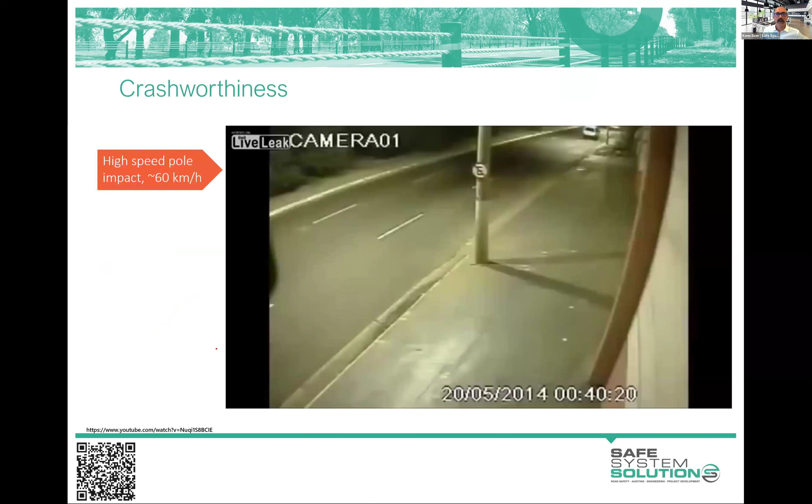Just to show the pure violence and physics of it, here's a fairly graphic video of an estimated 60 kilometer per hour side impact with a pole. So let's have a look at that - oh sorry, I'm going to have to just change.

The energy involved in that is huge, and these are unsurvivable energy levels on a point source hazard.

So people might say, are cars really hitting power poles and trees sideways like this, or is this a freak rare incident? Well, a lot of vehicles hit the side of or hit trees and power poles on their side.

Here's the classic scenario: driving along a long straight road that goes on and on, people have been driving a while and start to fall asleep. The camber of the road, which drains water off, also means they start to drift off the road a bit, say to the left. And they all of a sudden wake up and they're on the roadside or just leaving the shoulder. At that point, they pull the wheel to try to get back on the road.

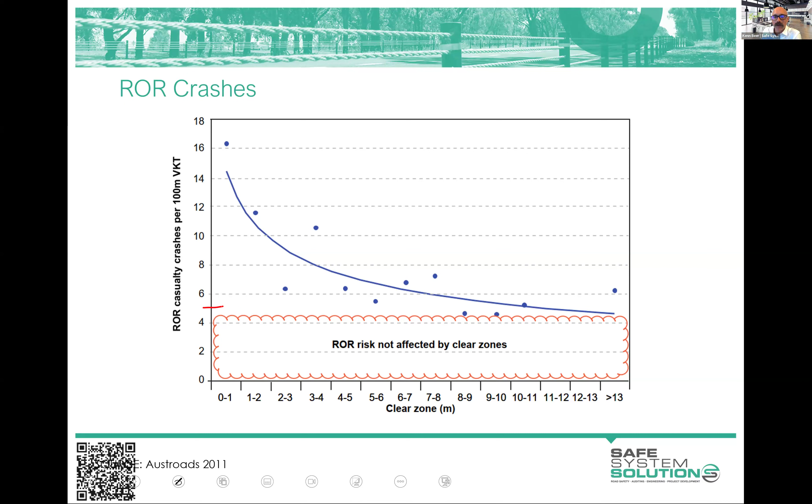That's interesting, and that's because of people going just beyond that and rollover crash risk and a few other things. The other thing important to note is a lot of the time you cannot achieve clear zone requirements. You can't remove the trees because that's the last of the remnant vegetation, and you shouldn't want to remove that. Also, your native vegetation offset costs would be huge, and then the cost of removal, or undergrounding power or moving power, these sorts of things.

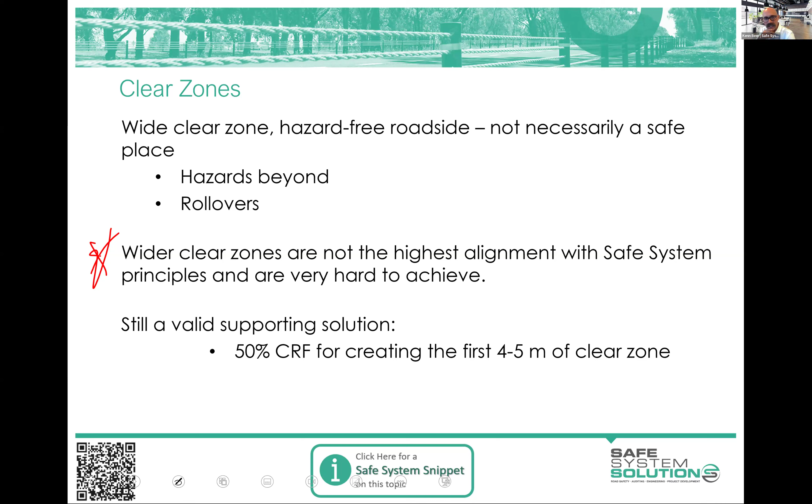So old clear zone theory, which we used to operate under, would basically say, what's your volume of traffic, what's your speed, what's the curvature, use this magic formula or magic table, and it'll say you've got a 9 meter clear zone you've got to meet, an area free of hazards, or 12 meters. That has been absolutely eliminated out of the Austroads Guide to Road Design Part 6, which is roadside hazard management.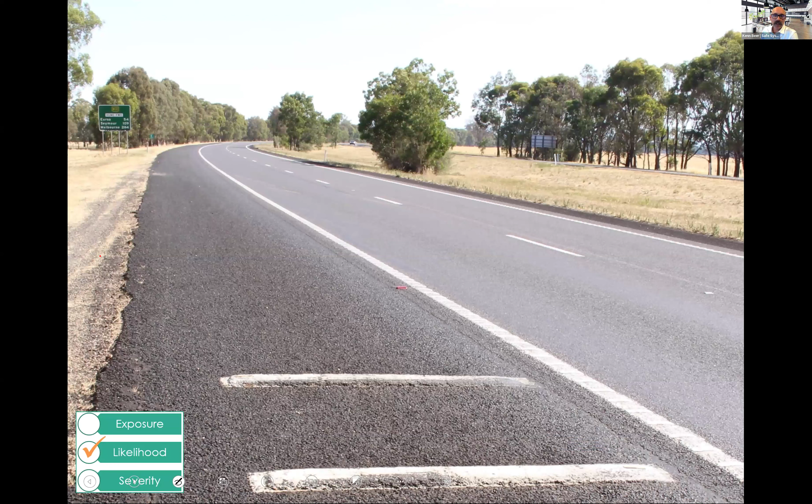And there's a new concept in there. But let me explain a little bit more about this briefly.

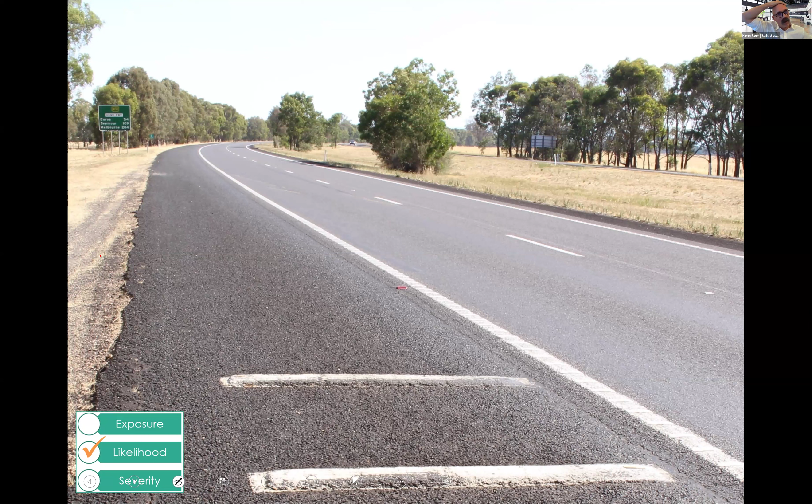Here's a bit of road that 3 or 4 years ago, if you followed the Austroads Guide to Road Design, here's how you would build a big bypass. Maybe you would have little trees that have grown in the interim, but essentially it would be a big wide median, calculated based on clear zones. It'd have some sealed shoulder, and hazards at whatever the clear zone is, 9 meters, 12 meters, or whatever was decided. Probably wouldn't have truck rumble strips because that was a little trial happening, but probably have audio tactile edge line.

Now, we've got a lot of good things here to reduce the chance of crashes. We've got a lovely geometric alignment, we've got generally a good surface, we've got those audio tactile edge lines, we've got raised reflective pavement markers, nice at night to be able to delineate the road, and you've got these big areas.

If you fall asleep and leave the road, hopefully you wake up before you've hit anything and you come back in. But nothing's happening for the severity of crashes. The vehicle driver's asleep and they run out and hit the trees at the same speed, they stop abruptly. Or the vehicle crosses to the other carriageway and hits another vehicle, the severity is high.

It's absolutely gobsmacking that in the last 5 years, even 3 years, we've seen billion-dollar road projects open. Not that dissimilar configuration to this. Brand new road, and within months of it opening, a vehicle leaves the road, crosses the median, and hits a vehicle coming through with a family, and everybody's killed. How on earth can you spend $1 billion on new infrastructure and then within that time have people go, wow, they were asleep, they fell asleep?

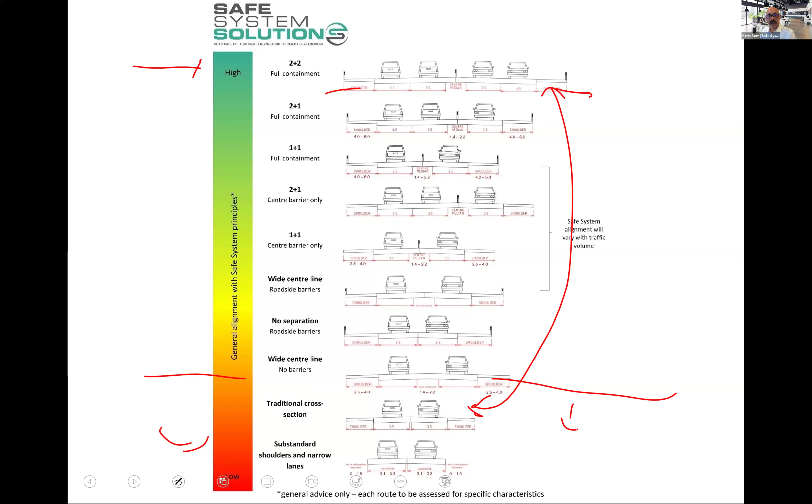A lot of work to do to get the community on board with some of that. But at a theoretical level, at least, that's what we know.

I've got some cross sections in there, I'm not going to jump through those. There's a lot of detail in how you would actually play that out. It's not as easy as just rolling it out. You've got to think about offsets, barrier types, end terminals, interactions, deflection areas, providing space for vehicles that break down or need to stop. You've got to think about all road users, motorcyclists, wildlife considerations, whole of life cost, maintenance, all sorts of things.

Actually, I'll pause there, Marissa, sorry to spring it on you. Was there anything that came up that I needed to deal with? We've got a question: why do they not use those rails to prevent them from going off path?

Barrier systems? The slide before, just your previous one. I'm not sure which one we were talking about. I think it was just the barriers. I think it was this one. Yeah, so it's a good question.

It sort of goes to the core of traditional thinking in road design and management versus what we need to move to in contemporary thinking. And the question itself shows you're thinking in a more contemporary sense, because traditionally it was all about building the road with the best geometric alignment, lining and marking it, and giving a little bit of a buffer for any mistakes. But drivers then had to be in control of the vehicle and make sound judgments, not fall asleep, be sober, and not be distracted. The only way to survive this kind of road is to operate absolutely perfectly for your journeys. The barrier system and continual barrier systems is an acknowledgment of that failure, that human failure.

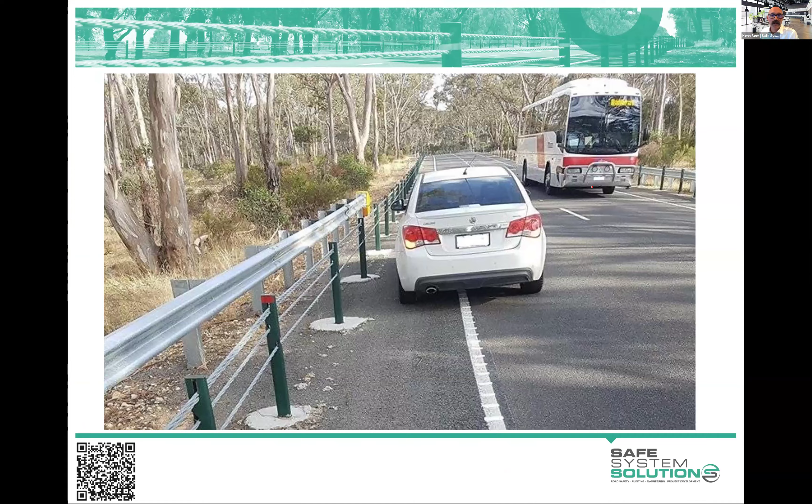Just a last little example, and then I'll get Marissa to take you through your assignment, which won't take you long. I like, again, people thinking about energy management. Can we do anything to lessen energy transfer?

This is a crash that happened in Mildura in Victoria, where an old Ford hit a power pole. I think the speed was, in the forensic crash investigation, something like 93 kilometers an hour. I'm pretty sure you know the scenario - it was 2 a.m., it's full of young males.

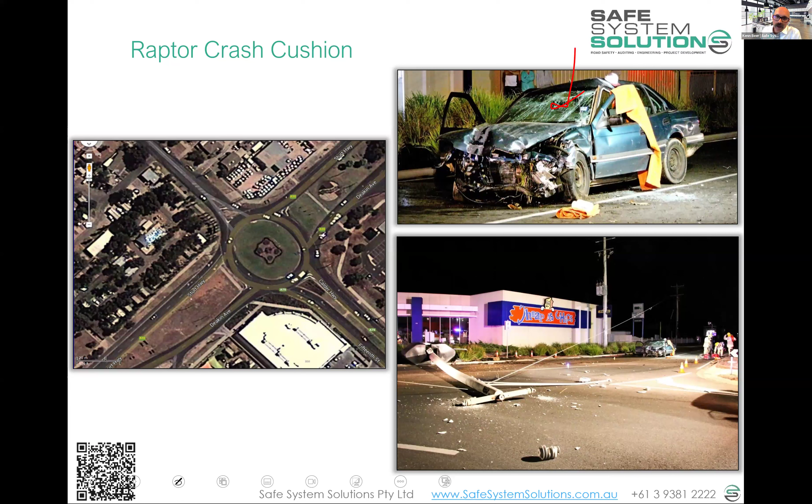So they hit the power pole, but the power pole happened to have one of these things on it, called a Raptor cushion. A Raptor cushion operates by saying, can we manage some of the energy here? It's not just like a cushion, like a football goalpost padding - it actually rotates a bit and tries to move the energy away from the pole. As the vehicle hits it and tries to move it, it crumples as well.

Interestingly, that 93-kilometer crash was in a vehicle with 0 stars in terms of safety under today's test protocols, and those 4 passengers only sustained minor injuries and have all survived. That's pretty outstanding, and it's from thinking about managing that energy. We need to do lots of work on lessening the number of people in those scenarios, and all of those behavioral challenges around getting in that car. But we also need to work on making our infrastructure more energy absorbing so we lessen severity, because incidents will occur.

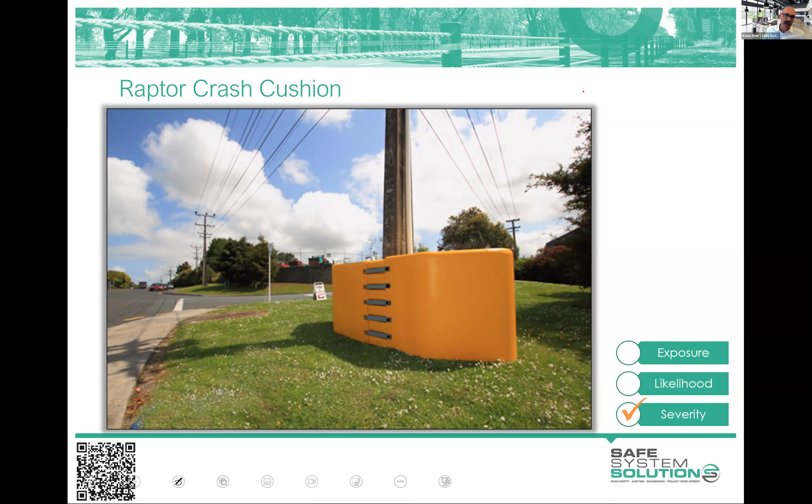There might be another quiz. What? I can't even remember what the other quiz is, Marissa. We may not.

I can tell you it's on sealed shoulders. Let's chuck it up, that should be up on the screen now. True or false: sealed shoulders improve road safety. Interesting - true, false, or unintelligible question again.

And while people are popping in their answers, can Raptor cushions be an improvement on frangible light poles? That's a good question, a prize-worthy question I think. You wouldn't use both - you use a Raptor cushion where you can't put a frangible pole in. You wouldn't put a Raptor cushion on a frangible pole because the frangible pole is meant to break away on impact, so usually it's those fixed poles that get the Raptor cushion. I would prefer slip-base frangible light poles if I can get them. Raptors aren't quite as good, but there's something to them.

All right, 3, 2, 1, end that poll. True - yep. Sealed shoulders lessen the likelihood of crashes. I'm not saying that things which only address the likelihood of crashes are bad, they're good, they're road safety, but sealing the shoulders isn't going to eliminate death and serious injury. We need more than that, the barrier system as well. For the unintelligible question, yeah, you can argue that too since I didn't give much context, but in most contexts, sealed shoulders improve things.

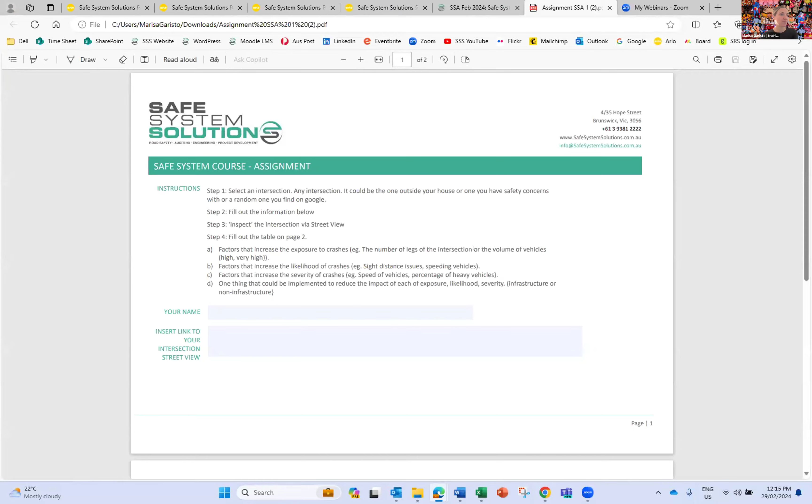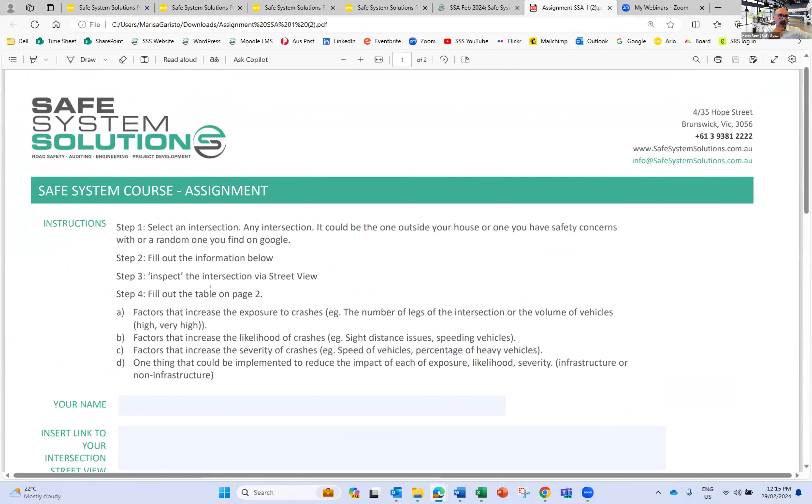Okay, so there's detailed instructions there for you, you can just follow that. But you see there, you're going to type your name in so we know whose assignment this is. And there we go, Marissa.

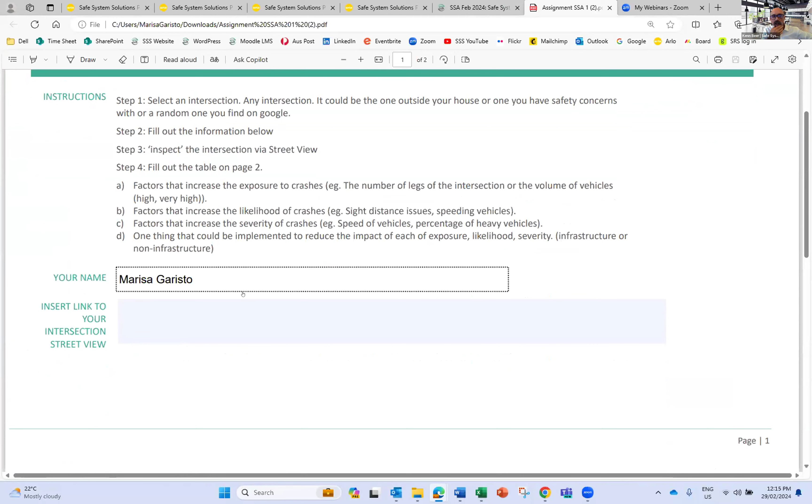And then you're going to have picked an intersection. Now this could be an intersection near your home, one you remember from a holiday, or one you've always disliked. But we want you to put a Street View link or the coordinates of it. So you're not going to need to go to this intersection for this exercise, you can do this all from your desktop with Street View. But we want the link in there so our markers can dive in and have a look as well. Okay, let's go down further to the page where the actual meat of the assignment is.

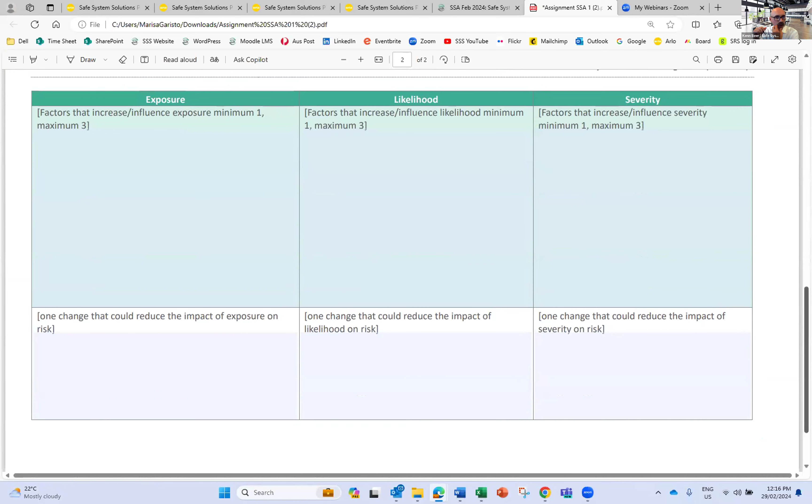You'll see we've got three columns: exposure, likelihood, and severity. What we're doing here is testing, do you understand what exposure is, what likelihood is, and what severity is? That is this assignment's purpose.

So what we get you to do is start by looking at your intersection, either via Street View or looking at your window, and say well what's influencing the exposure to crashes at this intersection? Remember, when I talk exposure, I'm thinking numbers - what's influencing the number of drivers going through here, the number of pedestrians crossing, the number of cyclists? It could be anything from the number of lanes, the fact it's on a major thoroughfare, or that it connects the shopping centre to the bus interchange, so your pedestrians are going to be influenced. So give us one to three things that influence exposure, okay?

Then go over to likelihood and say okay, what things in this infrastructure are influencing the chance people will crash? This could be speeds people go through, sightline impediments, confusing signage, line marking, poor lighting, or surface issues - all of these things influence the likelihood of crashes. So give us one to three of those.

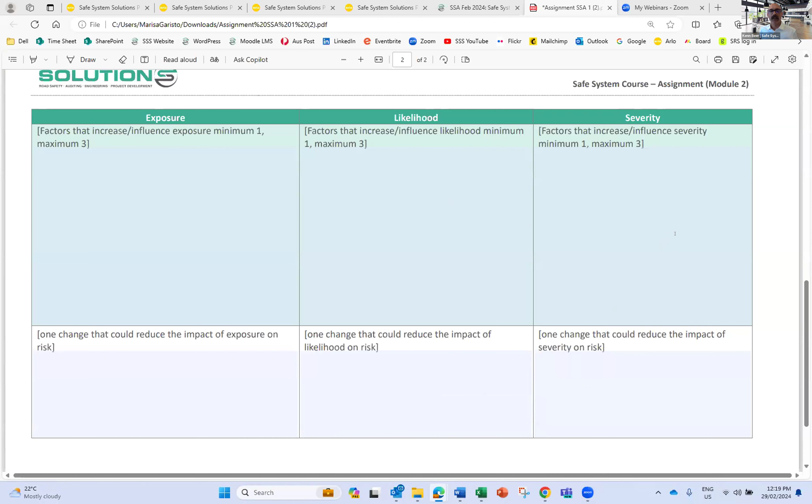Our markers are going to look at these and ask: does this person know what exposure is, what likelihood is, and what severity is? That's how you'll be marked on this - it's about categorization. They'll probably make a few notes if they see something in particular on your intersection, but you won't be marked down if something isn't absolutely feasible, as long as you categorize it correctly.

Then you're going to hit save on that. Yeah, and back to you, Marisa.

So that form, that PDF we just showed, is fillable. You can just pop your answers into the fields there. Save that, it should save as a PDF, and then we want you to upload it. So we jump back into...

That's not letting me make a submission actually. Are you in? Right, yeah I am in, student, but I'm not sure. I'd have to sort of... sorry about that. All right, so back into module 2.

If you click into Safe System module 2 assignment, there will be - not sure why it's not coming up right now - but there will be a little submit button. So you can just click on the submit button. I'm sorry it's not appearing for me right now, I'll have to check the settings in the background. But there is just a submit button. Press submit, upload your document into the system, press save, and that will send us a notification that you've submitted it.